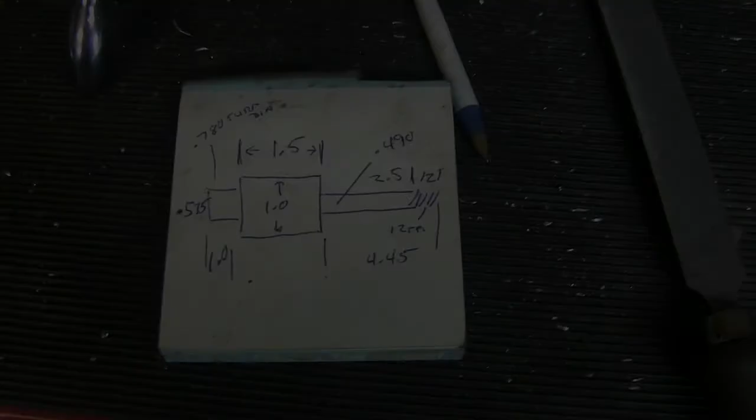Okay, so this is basically what I'm going to be making here. This is the piece off of the mill, and this is a half 12 thread. Don't ask me why they didn't use 13, but that's what they did. And I want to attach this hand wheel, which is going to double as the vice speeder. I'll be able to take it off and put it on either one.

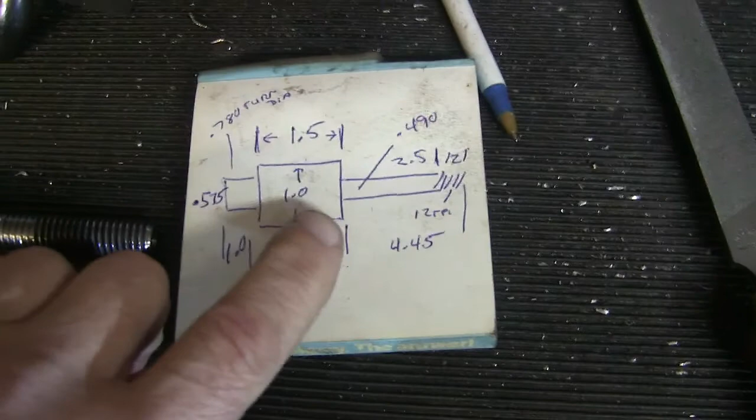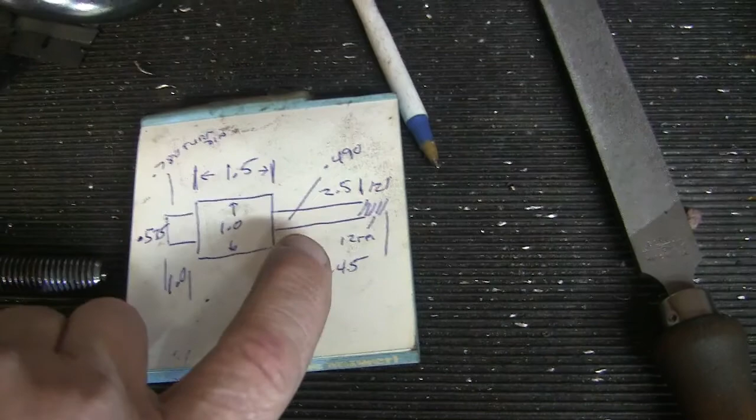Here's the sketch that I'm going to make. Basically going to leave this diameter alone because that's the diameter of the bar stock I have. This will be turned down round initially, but then I'll mill it with the square on it. And then we'll just turn this down and thread it for half 12, similar to that.

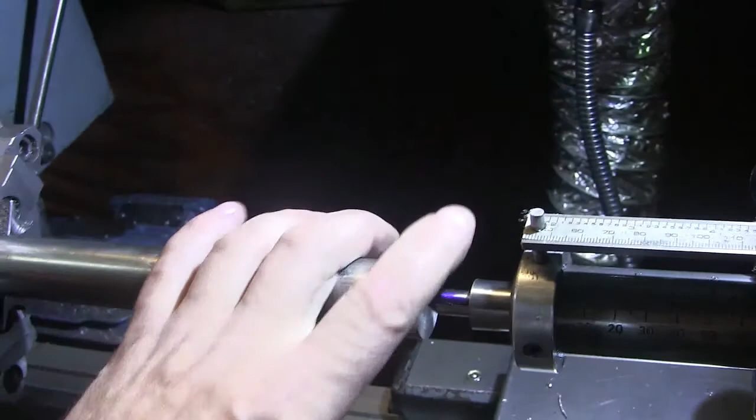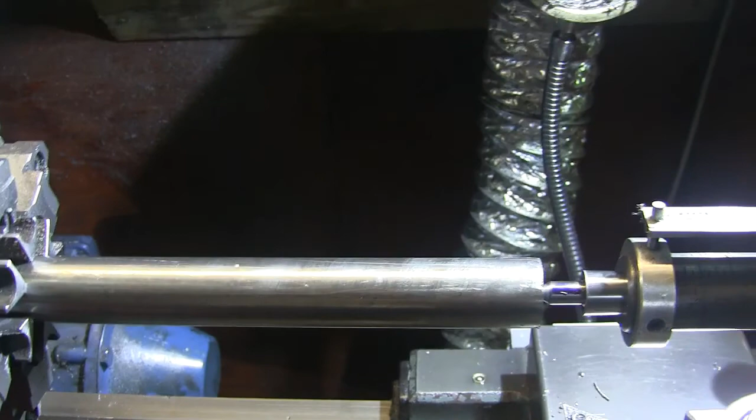So what I did off camera is I put this piece of stock in the lathe and faced off the end of it, put a small center hole in it, got my concentric center in here. Everything's ready to go. I'm going to be using the DRO on the lathe here on the x-axis, and we'll just get to turning this thing. Got some threading, and then we got some milling to do, and then we'll put it in the machine and everything will be cool. So follow along with me.

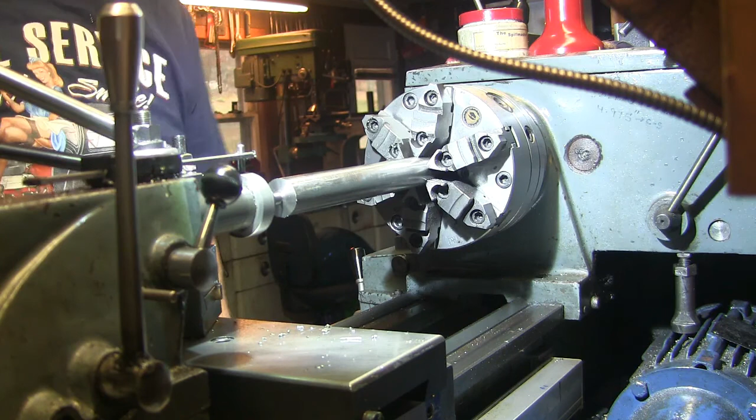Okay, so the first thing I'm going to do here is I'm going to come in and touch off on the end here. I'm going to set my y-axis to my x-axis to 0. I'm going to come out, come down 4.45 inches. And I'm going to put a mark on here, and this is the part we're going to turn down to ½ inch.

Okay, I'm going to come back, I'm going to touch off. Okay, sorry about that. It's cold in here, so I got the heater going. Every time that thing kicks on, there's no way you're going to hear me talking, so we'll be in and out of this video here. When that thing comes on, I'm going to shut the camera down. So let's get cutting here.

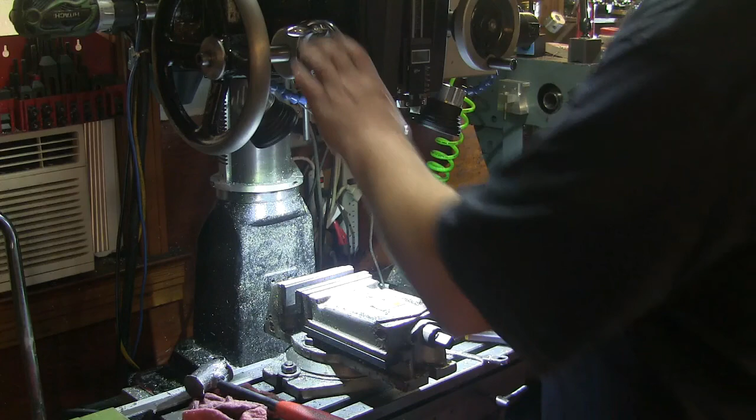Alright, we got the handle done. Can unlock the quill, lock it back up, take this off of here, put it on the vise, speed handle vise.

I saw this originally on one of Chris B's videos, but I'm pretty sure that he gave credit to Mr. Pragmatic Lee for figuring it out, and you know, I just stole the idea, but yeah, this works out pretty well now. I don't have that handle in the way, so

We just made the mighty Rong Fu even mightier. Thanks for watching.